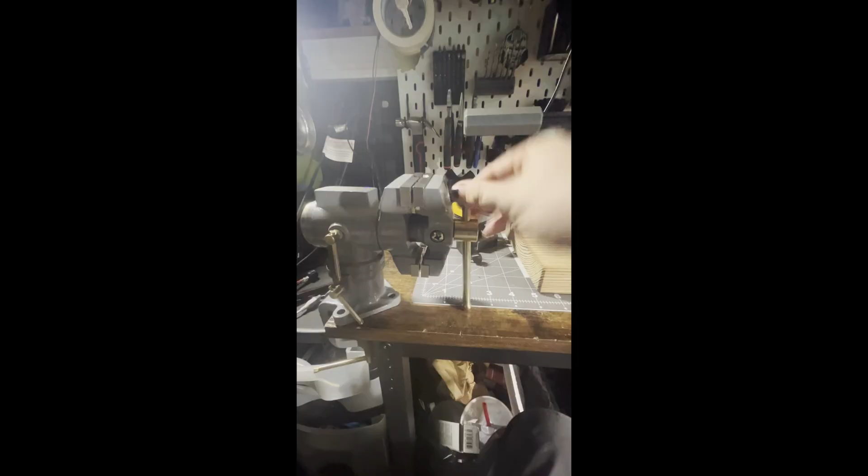But there's a problem. This bar is constantly banging into stuff. It's driving me nuts. I think I can change that, and just in general make these a little bit less annoying to deal with. Now, this angle isn't perfect, but it's going to have to do for the time being.

I'm thinking something like some clamshell designs. I think that's what these are called, because I like how they look, and they're pretty comfortable to hold most of the time.

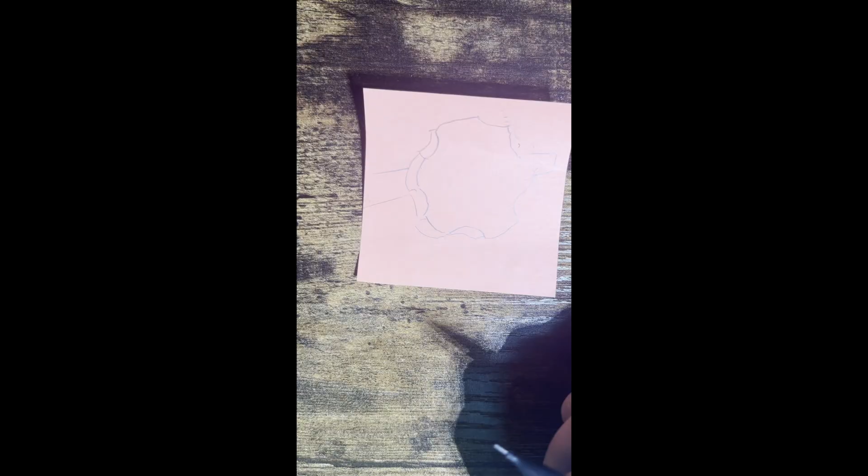I think something like this with some back, like an extended back to house some heat-set inserts, will work. And I say that because I've already done it. I kind of cheated with this because I've done part of this project before and it didn't quite work.

Here it is. So this is the actual first iteration of the knob. It worked, didn't work very well though, and I think with some bigger screws it'll have a bit better hold, and with some magnets it'll hold the bar even better.

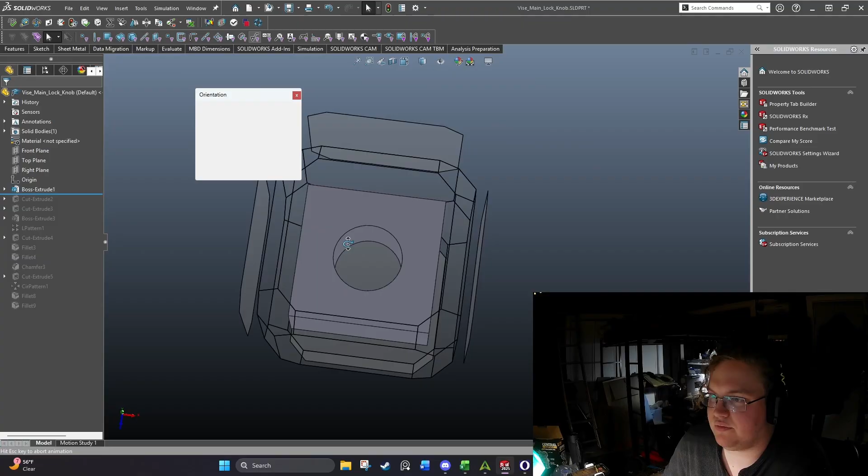Let's get to the actual CAD part of it. So in the future I'll be better about actually doing this in real time, but again I kind of cheated with this project. First I started off with a very simple hole and square, the hole for the actual mount of the bar.

Then added a hole for the heated insert, added another hole for the through screw. Then I got to the basic form.

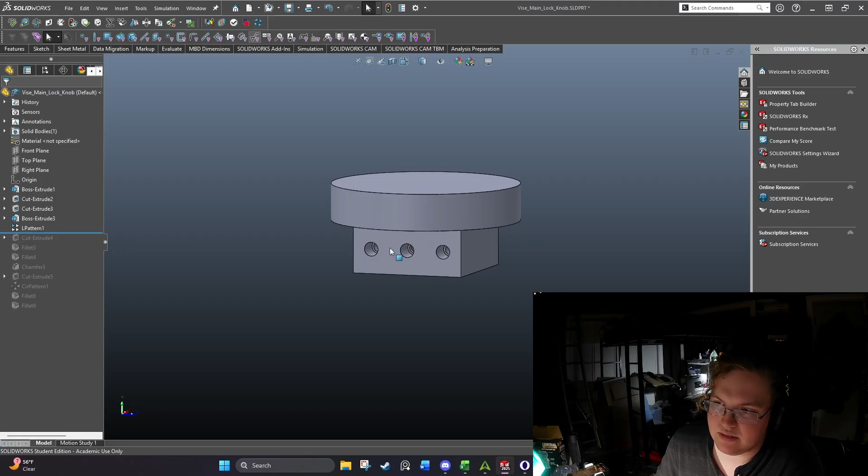Added some more of the screws, added the slot for the bar to go all the way through, added some fillets to get rid of some material and look a little bit better, more fillets, chamfers.

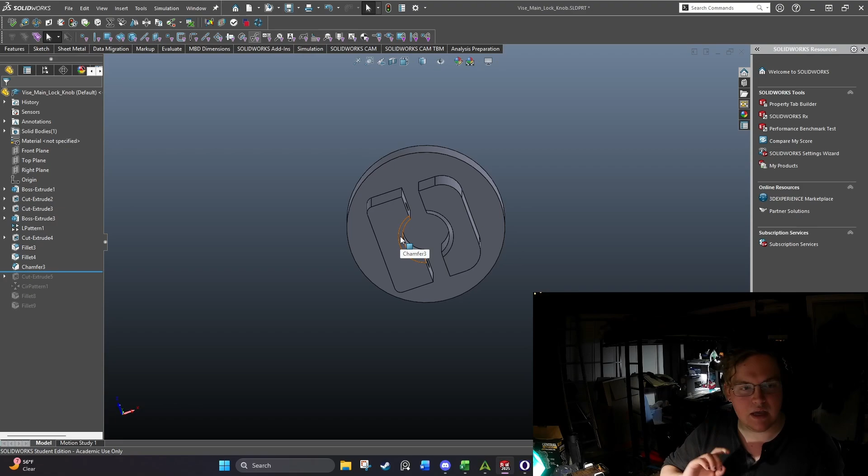Added some chamfers. That chamfer is for it to slide onto the top a little bit easier. Adding a chamfer to the entry point of a blind hole makes things go on way easier, in my experience.

And then the circular pattern for the actual notches that are held onto. I use black filament - this is a black background, not very helpful, but...

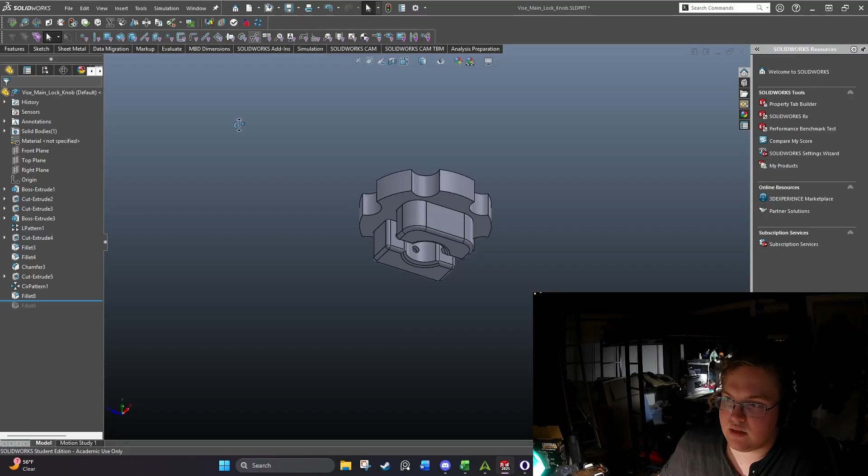Added some more fillets on the bottom, and added some more fillets on the actual top so it can actually sit a little bit nicer in the hands. There's no hard, rough edges.

Now let's get to printing. Actually, no - before we do that, I need to actually do some more redesigning. So there's actually less holes for the heat-set inserts, and I'm going to try and fit in a magnet here. Be right back.

Let me show y'all something that I think is pretty helpful for some of these things, especially for 3D printing. I use Obsidian to jot down ideas that I have, but I also use it for tolerances for 3D printing.

So for 3D printing, there's tolerances. There's tolerances in every single machine, every single tool. So if I design a hole to be 10 millimeters exactly, like this one here...

Oh, this is hard, I'm left-handed. If I design a hole to be 10 millimeters exactly, it's not going to fit this.

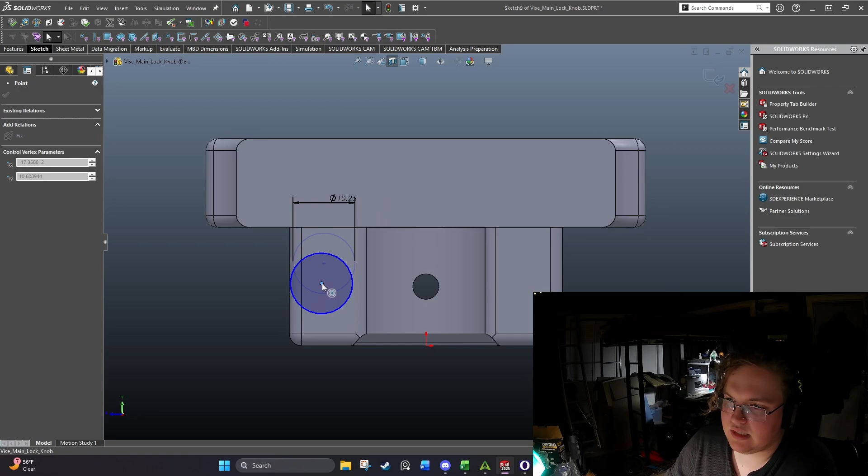Anyway, back to SolidWorks. So since this is going to need to be... if you can believe it, I have my SolidWorks license, it's just not showing here.

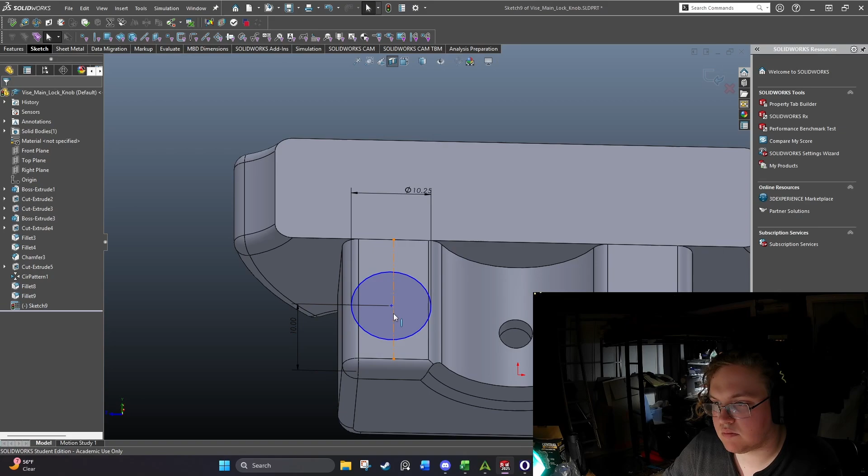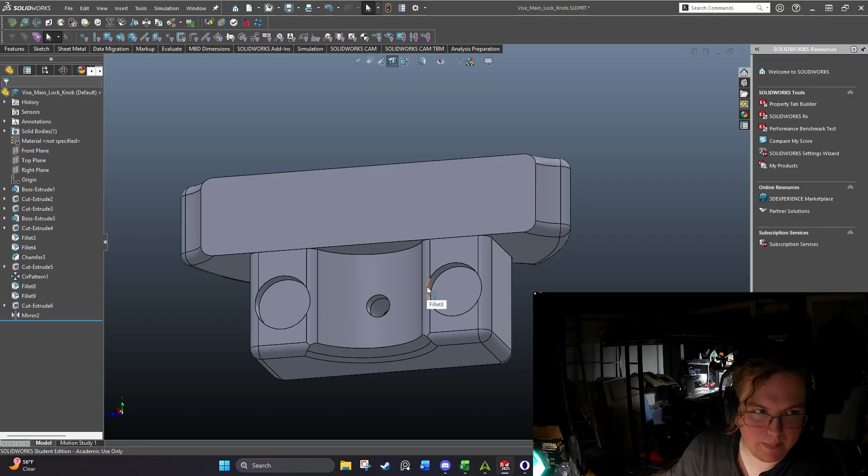I'm hoping that fillet is enough, like there's enough material there for it to not matter too much, but I am going to try that.

Also, this used to be a 3 millimeter, an M3 insert, but I just didn't realize how tiny M3s were at that size. So now we're going to be using M4s, a bit more substantial.

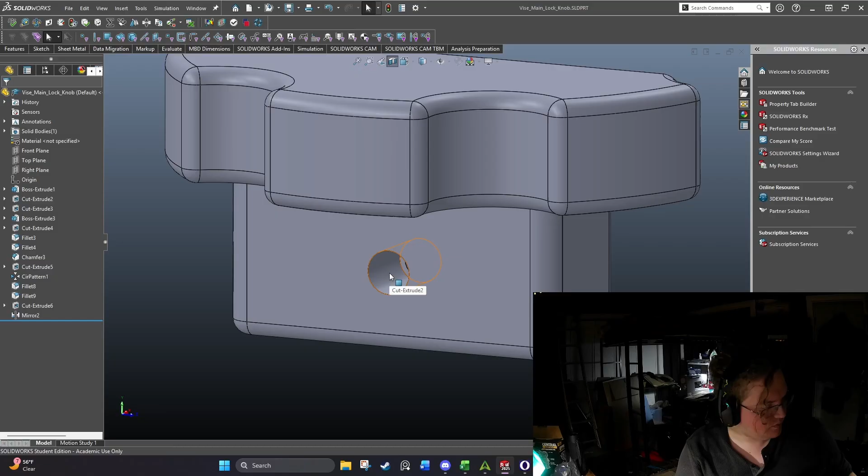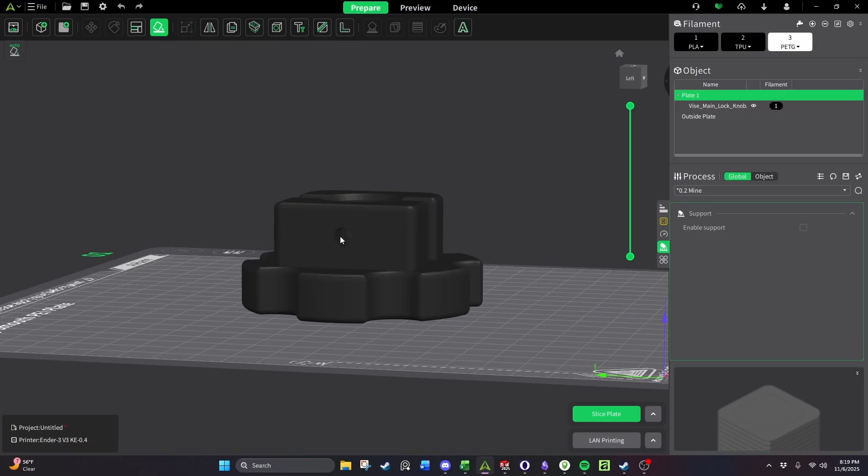Now I'm going to save this as an STL and send it onto the printer. While it would be best practice to add some supports into the spots that are definitely going to need it, like this overhang, the one I'm worried about is this hole right here for the threaded insert, but it is so hard to get those supports out, so I'm just going to hope and pray that it'll be enough.

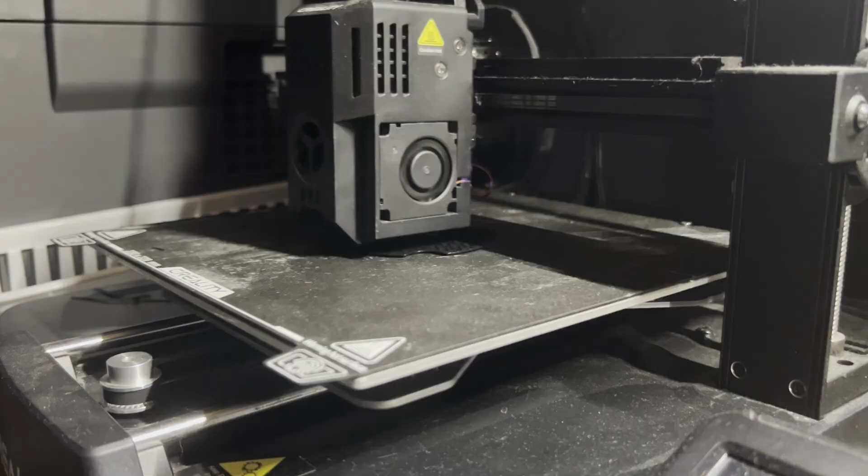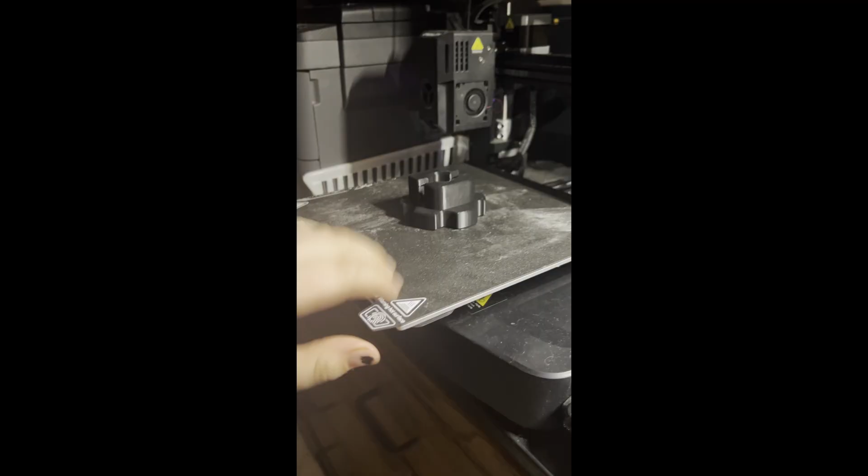Knob is done, feels fantastic in the hands, looks good, print was good quality.

So now I'm going to insert heat-set inserts into here with my heat-set insert press, which is going to be the topic of the next video, I imagine.

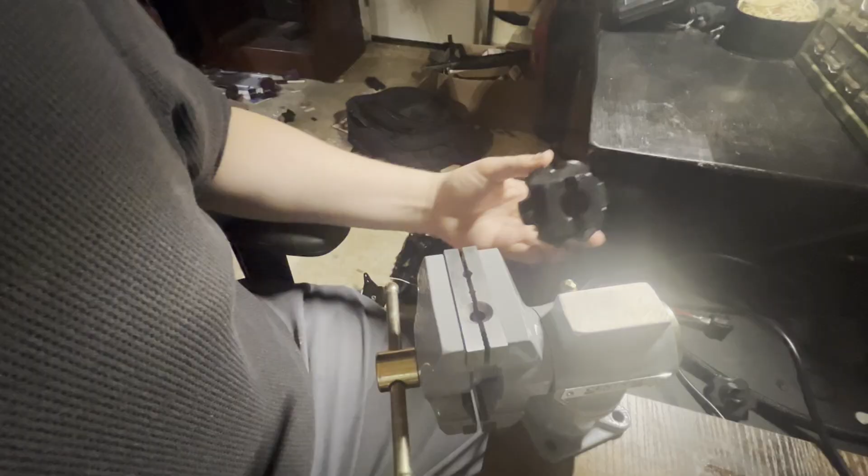A little hard to see in this light, but I added two 10mm by 2.6 magnets set in here. If you can see it, but you can definitely hear it. And an M4 by 18mm screw.

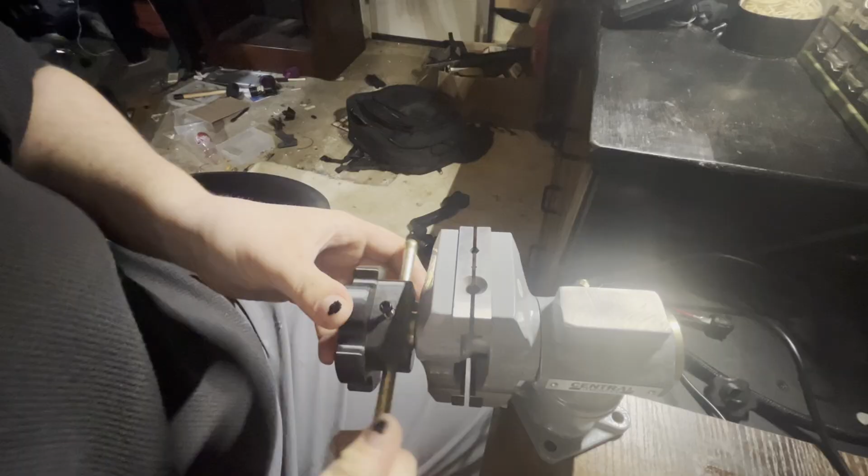Now, the moment of truth. Nice tight fit. Now let's tighten it down. Good. And the magnets are holding. I still have access to torquing it down when I want to, but yes! That worked fantastically if I say so myself.

Now the main vise knob is actually working fantastically. So now I'm gonna start to tackle the other two side knobs that access the rotation jaws and the actual swiveling of the jaws. Let's see what happens.

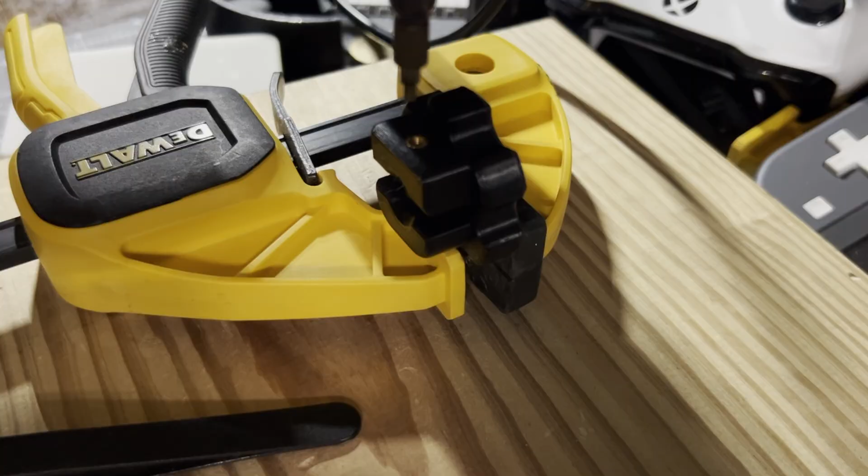So it turns out the one I first designed for the side knob, screw works great. The M3 will hold on to that part perfectly fine, but that little magnet is way too tight of a fit. It's almost impossible for me to get it on. So I'm just gonna reprint it.

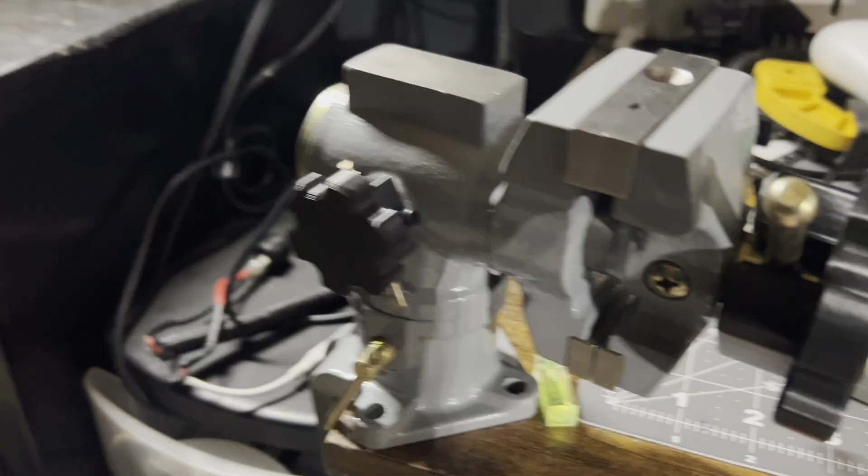Here's the knob. Magnets are holding the bar in place just like it is on the big one. I can turn it, torque it on down, and the bars stay in place.

Let's focus on this one now. So I have the new knob on. It works fantastically. The magnets are holding the actual bar in place, so I'm still getting the rotation. I can turn things, I can pull it out when I need it.

We're all good. Now I'm going to start on the bottom rotation swivel, and I think I might have found an idea for that.

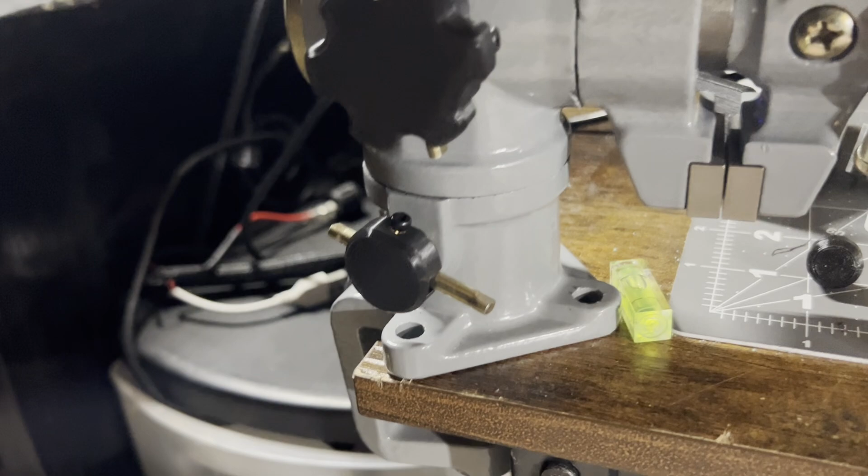Now, the moment of truth. Did I do this well enough so that it'll pass the test? I would say yes, yes it does.

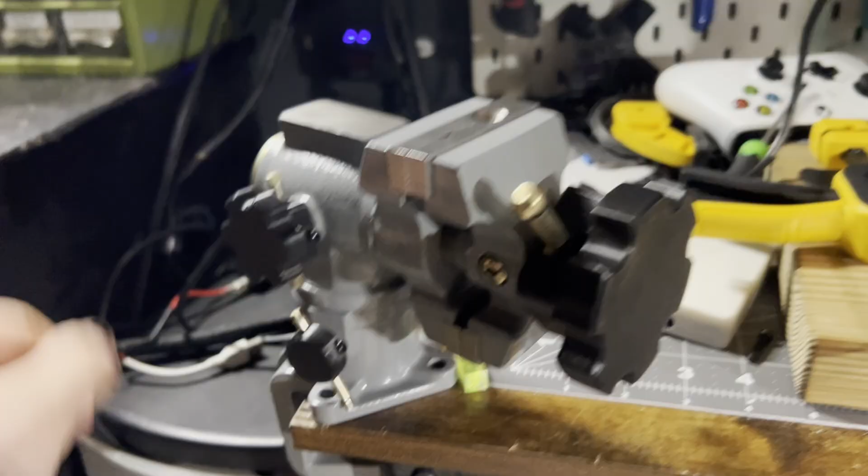Now we've got all three knobs. Wonderful, wonderful. Now that I have all three knobs working exactly how I want them to, I would say that this project is done, and it's a success, well done if I do say so myself.

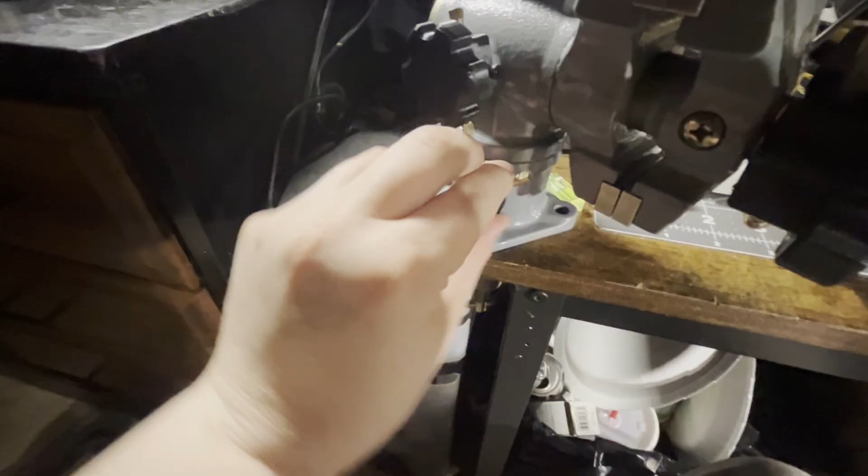One of the things I love most about industrial design is trying to improve the quality of life of products, trying to figure out pain points of products. And while I don't think this is an absolutely necessary modification to get any vise to work, I think it makes it just that little bit better.

That makes it more of a joy to use, and I think that's something designers, and I hope to one day be a designer, need to focus on: what's the benefit of something being necessary versus it making some part of life better, some usage any bit better. And I think that's something...